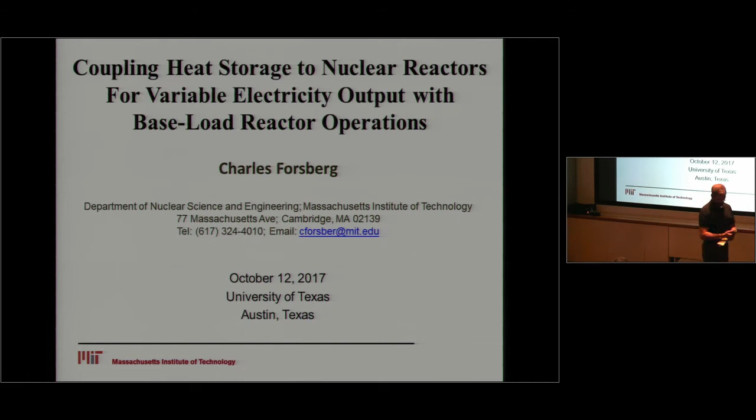I'm going to talk about heat storage rather than electricity storage, which of course is the in thing. Sounds like a very primitive technology, some of it is, but it has one redeeming feature, and that is it's cheap. So that's the general thesis. If you're going to have storage, it better be economic. Otherwise you might as well go home, it's irrelevant.

I'm going to cover a couple of things. The first one is the obvious: economics is central. Second, electricity markets are changing. And third, three heat storage strategies to provide dispatchable electricity with baseload reactor operations. That means the reactor operates at steady state.

The reactor operators are bored. We like bored reactor operators. Turbine hall, things are a little more exciting. We like exciting turbine halls. And we're going to look at three things: how to get variable electricity to the grid with heat storage in a steam cycle; second, setting a minimum price for electricity with the excess energy going to industry; and third, a nuclear power plant that buys and sells electricity depending upon the instantaneous price of electricity.

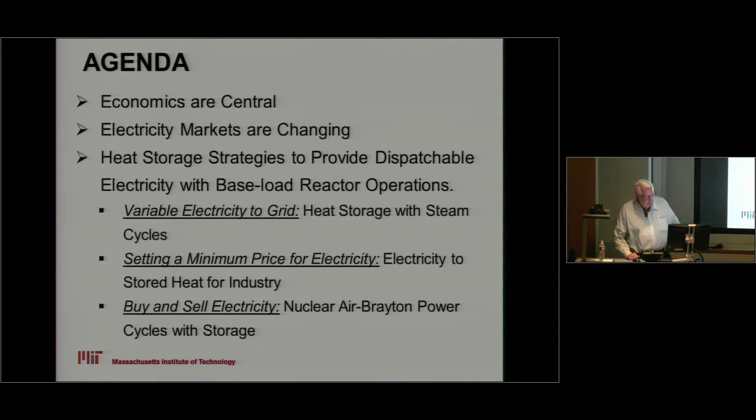Now, I'm only going to have one slide on economics, and that is that economics matters. The important observation here is that energy is 8% of the GNP. We cannot afford to double the price of energy without serious impacts on human standards of living globally. And thus you have to be economic, that's the bottom line. If something's 1% of the GNP, you can double it, maybe a few complaints, but it's no problem. If it's 8% of the GNP and you double or triple it, this is really, really, really bad news.

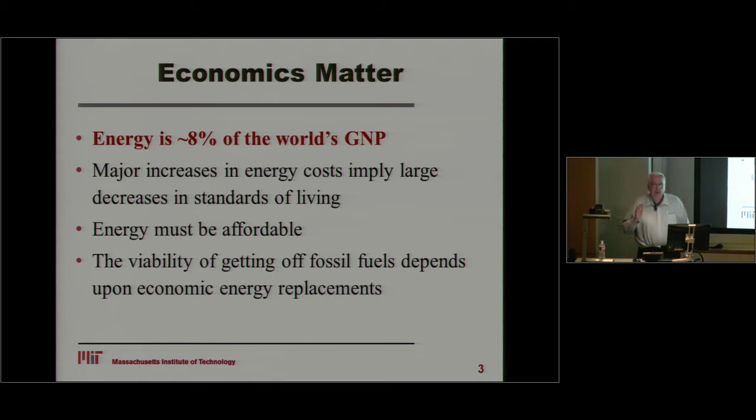Well, let's take a look at electric markets, and they are a-changing. Let's take a little look of history here. First, important to note, there's been no change in energy policy for 300,000 years. The strategy is quite simple: throw a little carbon on the fire.

I show our previous version of heat and light called the cooking fire and the modern version, the combined cycle natural gas turbine. What's interesting is these two technologies, though they look very different, are economically identical: they're economic at part load. You can run them at half capacity and it doesn't cost you any money, because the campfire with its stones and the gas turbine are low capital cost systems. There's not a lot of money in it. The money and labor is in collecting the fuel, be it wood or natural gas, and bringing it to the fire. That's been our strategy for 300,000 years.

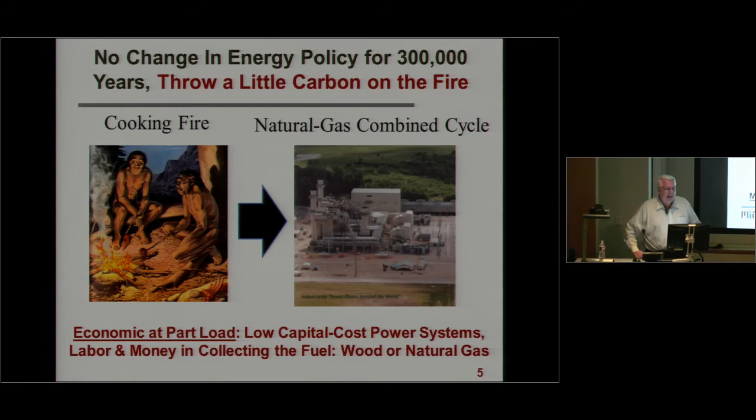Now let's take a look at the low carbon options. Nuclear, wind, and solar are high capital cost, low operating cost technologies, and if they're going to be economic, you have to run them at full capacity. If you run them at half capacity, the energy costs twice as much. This is a fundamental change in economics, the first change we've had in 300,000 years. So you can understand why this energy change to a low carbon world is so difficult. We changed all the rules.

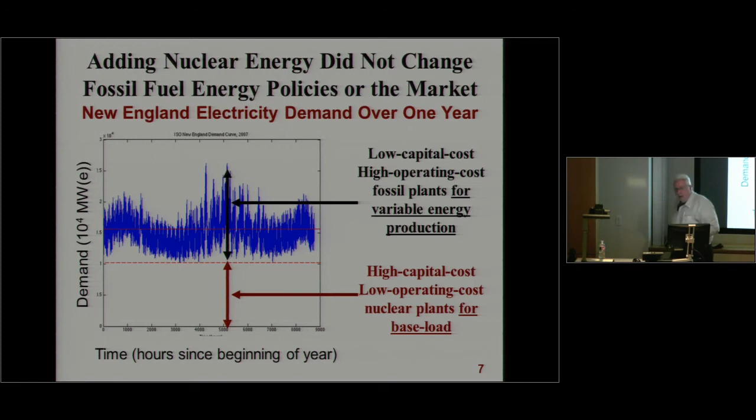Now let's take a look at electricity demand. This happens to be the yearly electricity demand in New England for 8,766 hours. The demand is the vertical scale. I'll make the observation that adding nuclear energy did not change fossil fuel energy markets or policies. What we see is the baseload market: nuclear's here, and the top part, the variable part, was provided by fossil fuels. That's been the historical model of energy for the last 40 years in the United States.

Now the question is, if no fossil fuels because of concern about climate change, what replaces the variable electricity production? What's the replacement for the gas turbine? That is the question. Let's look at this from a different perspective.

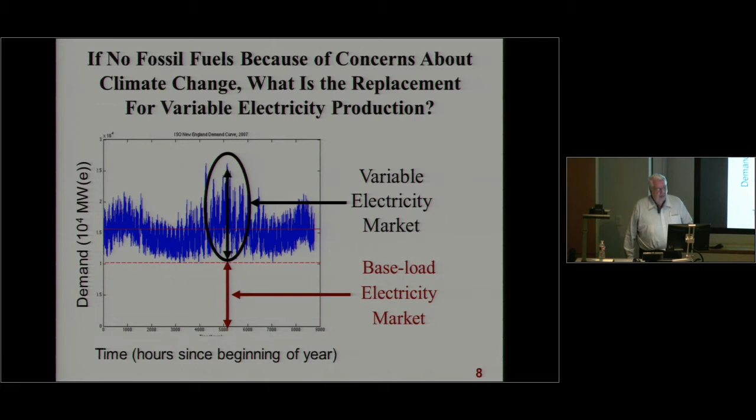Now I'll let you in on a little secret: nobody can make money on a solar system where the revenue or value of the product is zero. This is like in New England getting the price of tomatoes—everybody plants tomatoes in their backyard, and they all turn ripe in August. Guess what the price of tomatoes in August is in New England? Negative. People are giving them away to their neighbors.

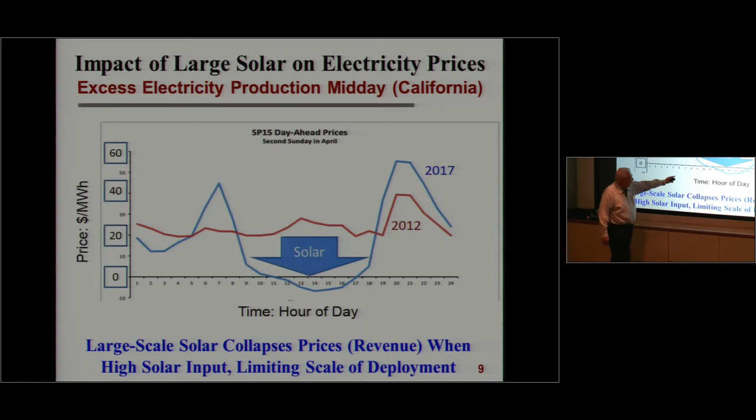So we've got a bit of a problem here, and of course this is a two-part problem. When the sun goes down, you suddenly need a lot of power, so you have to buy expensive stuff to produce electricity. What you can see here is that large-scale solar collapses the prices, that is its revenue, when you have high solar input. And that limits economic deployment to about 15% of total electricity production, if you have good solar conditions.

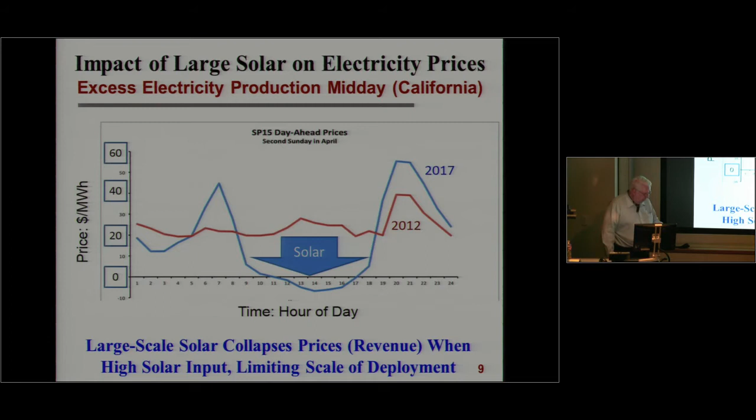You can play the subsidy game, but you can't do that on a full-scale economy. Well, that's what's the impact of wind.

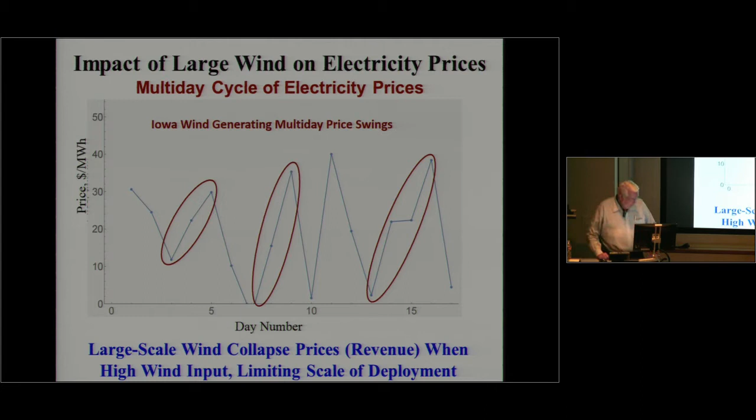This happens to be western Iowa wind. Price of electricity has a multi-day cycle with wind patterns, so we're looking at multi-day data. Guess what? If you install a lot of wind, price goes down, goes below zero, close to zero. Install a lot of wind, revenue collapses, limiting deployment. Bit of a problem.

Now, what this says is we need storage to match production with demand. But then the question is, what kind of storage? In this context, I will note there are two options, heat or electricity, or actually I should say work, for those of you who had Thermodynamics 101 or whatever the equivalent thermodynamics course is at UT here.

In this context, there's a big difference between nuclear and PV and wind. Nuclear produces heat, that is converted to electricity, and so we have the option of storing heat. We also have the electricity option. Electricity, of course, if you start with electricity, you want to store it as electricity. That means batteries, pump storage, a variety of other technologies. Well, let's take a look at this difference between heat and electricity.

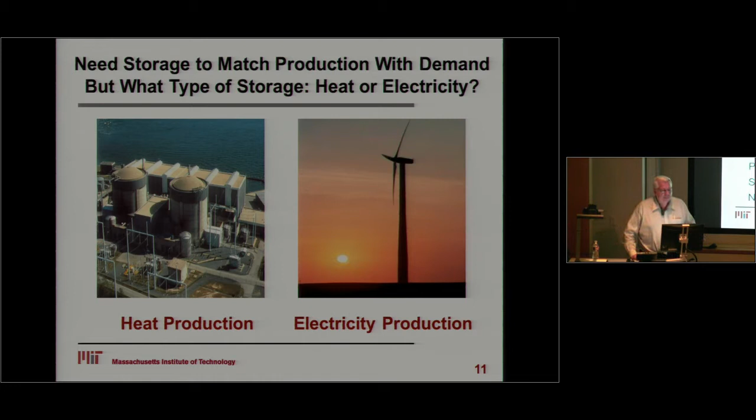The first observation we make is that heat storage is cheaper than electricity storage. There's recently a detailed study out of Nature Energy that estimated energy storage costs for 11 technologies at the terawatt scale and came out with a scary number of $340 per kilowatt hour, which essentially means you just tripled your electric bills on an all-renewable system. Factor of 2, factor of 3.

Now, the DOE battery goal for just the battery pack, never mind all that electronics, is $150 a kilowatt hour, with a lot of people debating about whether that is a fairy tale. The DOE heat storage goal is $15 a kilowatt hour, and by the way, that's by 2020, except it may happen before 2020.

So what we see is that heat storage tends to be 1 to 2 orders of magnitude less expensive. And that's what this story is about: buying cheap storage rather than expensive storage. Recognizing cheap storage helps nuclear, helps wind, helps solar, helps everybody except the gas guys. So that's the game.

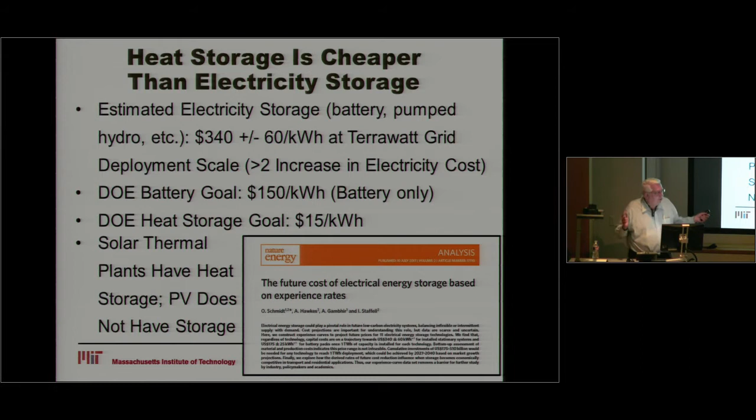Now, I'm going to discuss three separate areas. I'm going to start with light water reactors with heat storage, and that means variable electricity to the grid. It's coupling baseload reactors with steam cycles for heat storage. We had a workshop on this last June. If any of you have an interest in the workshop proceedings, just type in that very long address at the bottom and the report will come up as a PDF file and you can take it off the web. Most of this came out of that particular study.

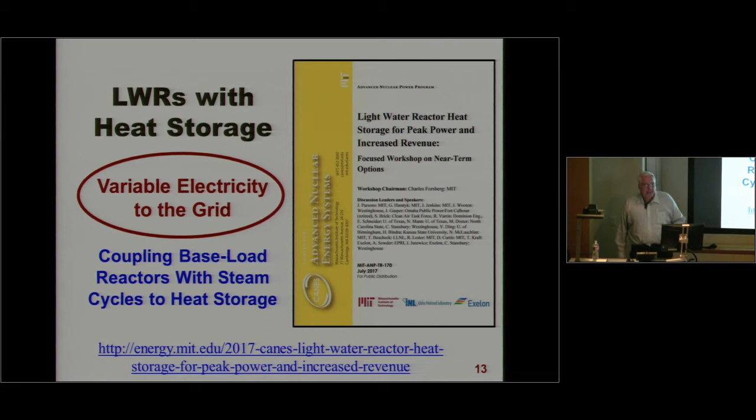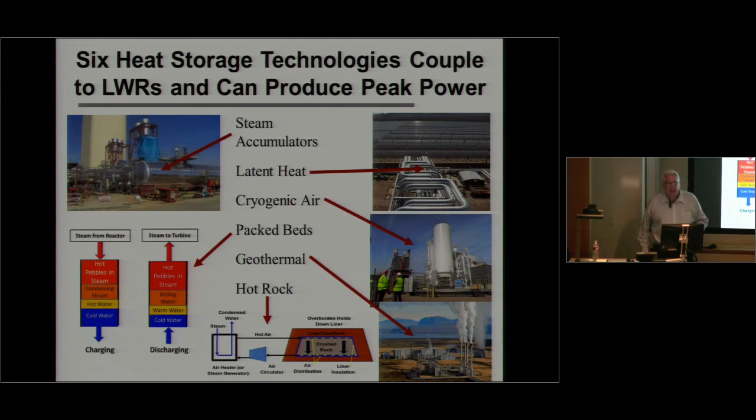Now, I'm going to cover this a little bit later, but there are 6 storage options that you can couple to a steam cycle. I'll go through the technical details a little bit later, but I want to discuss the more broad section first. There are 6 classes, slightly different, and we'll discuss that later. Now, the important observation here is that heat storage economics, in addition to absolute prices, are different than electricity storage economics.

Now, if you look at most electricity storage options, I'm using pump storage as an example. Batteries have a similar feature, almost all of them are similar. The storage system has 2 separately sized systems. In pump storage, the idea is when you have cheap electricity, you pump the water from the bottom of the hill to the top of the hill. And when you need extra electricity, the water goes through a hydroturbine on the way down the hill to produce the electricity you need. If you look at the economics of pump storage, there are 2 cost structures.

The one is the cost of storage. In this case, it's that reservoir on top of the hill, and that works out to dollars per kilowatt hour. The second feature is the cost of electricity input and output. In these systems, there's a turbine generator combination that can operate as a pump, a reversible turbine pump with a motor generator, that is a fixed dollar cost per kilowatt electric throughput. Two cost structures: storage and the input-output device.

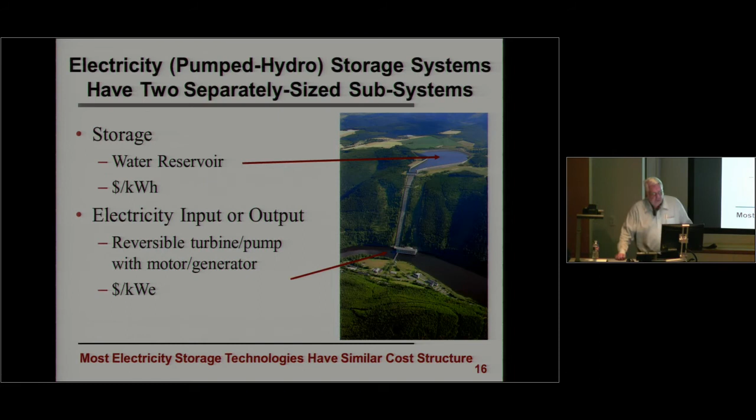And most other electricity storage technologies have a similar cost structure. Heat storages are a little bit different.

It has 3 separately sized subsystems. It has a system that takes the steam from the reactor and inputs it to the storage system, measured in dollars per kilowatt, and for most of these storage systems we're talking about, that is very close to 0. It's a really small number. There's a second cost, the cost of storage, dollars per kilowatt hour.

It has a third subsystem, taking that heat to convert it to electricity, and that's one of the more costly things because you have something called a turbo generator. But it's a 3-component system, 3 different things that you size separately with 3 different cost structures.

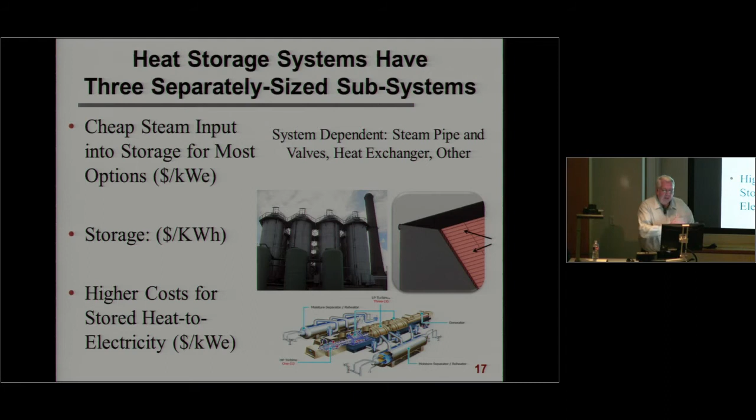And if you take a look at a power plant, you have several options of how you can do this. Option A, storage system uses power plant turbine for peak power. Steam goes to storage when prices are low. I'm not going to go through that schematic, by the way. Stored heat to LWR turbine systems for added electricity.

But the important point to be noted in a light water reactor, a nuclear reactor, is that when we take that steam and put it back into the storage systems, we only have to incrementally increase the size of the turbo generator. We have the option of using the power plant's turbo generator, the expensive component of the storage system, and instead of buying a standalone system, we buy our nuclear reactor with a slightly larger turbine and a slightly larger generator. Why is that important?

That incremental cost is less than half the cost of a standalone system. Factor of 2, factor of 3 reduction in the cost of the expensive component, which is that turbine hall. Factors of 2, factors of 3 are economically very important.

There's one other feature. If we use the existing turbo generator, it's operating continuously all the time. So if we want to add more power, we can add more steam very quickly, and the power level will go up or go down very quickly.

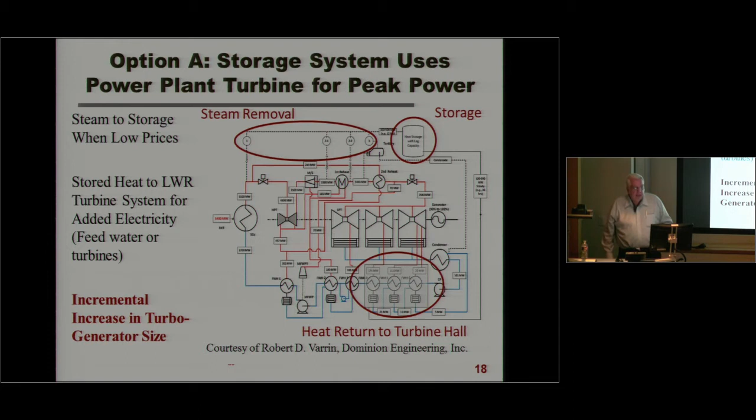So by integrating storage into the steam cycle, we get a couple of things, of which the most important one is knocking down the capital cost. The second one is fast response. Option B, of course, the economics for existing plants with added storage suggest a power output that would go from 80 to 105%.

And here's our curve again of our solar curve. When the price of electricity collapses, we take a lot of steam out in a hurry. We lower the power plant's production and we dump it into storage. So we may take out most of the energy going into the storage system over a period of maybe 8 hours or maybe 6 hours.

But then we bleed it back into the power generating system over 16 or 18 hours. So we minimize the size of the turbo generator system, the expensive component, and thus minimize the cost of our overhead storage, total storage system.

Now, fortuitously for us, pure luck, it turns out that the solar curve matches very well with a steam storage system hooked to a nuclear reactor, because the solar only provides a lot of heat for a limited period of time, and it's easy for us to get heat out of the reactor and into the storage system cheaply. On the other hand, we can put the power back into the grid over a long period of time, so we don't have to buy a lot of that expensive generator, expensive turbine.

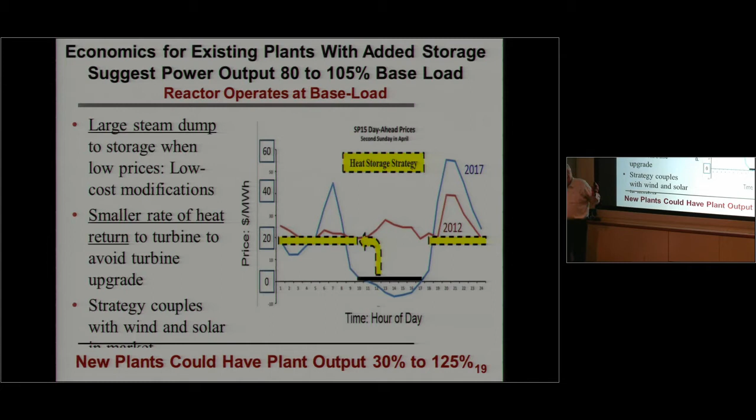Makes sense. This is customizing your engineering to match the market. It's very important on storage systems you start with the market. It drives your engineering. It's the only way to make the system economic.

Now, new plants, if you do the analysis, we think a new plant might have a power output from 30 to 125%, where 100% is base load.

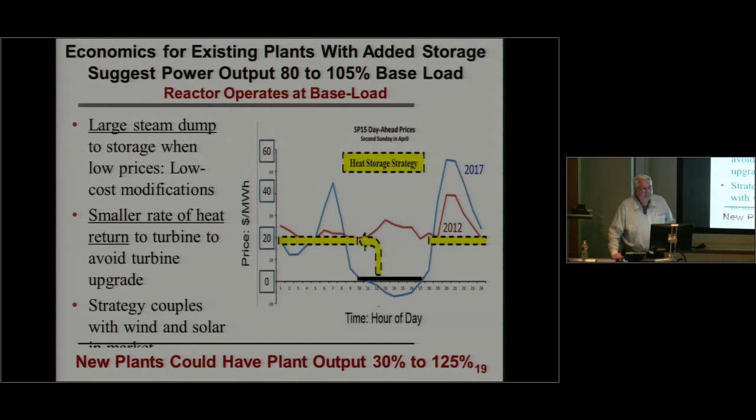The other option is heat from storage to a standalone turbo generator. It gives you a complete set of design freedoms, but it may cost you a lot more money, and money is, of course, the concern that we have in heat storage. But I would think this would be a preferred option with an existing plant.

No, it turns out most nuclear existing plants have 10 to 15% excess capacity in the turbo generator set, and it looks like in most of those plants we can backfit. We can't dump all of the heat out, but we could go from 100% power maybe down to 70 or 80% power, a partial storage solution.

New plants, you have much more freedom, but it's a plant-by-plant specific question. And there are lots of reasons for that. It turns out the nuclear reactor was expensive and the turbine hall was cheaper, so they oversized the turbine hall to make sure that if they could get an uprate, we wouldn't have to do anything in the turbine hall.

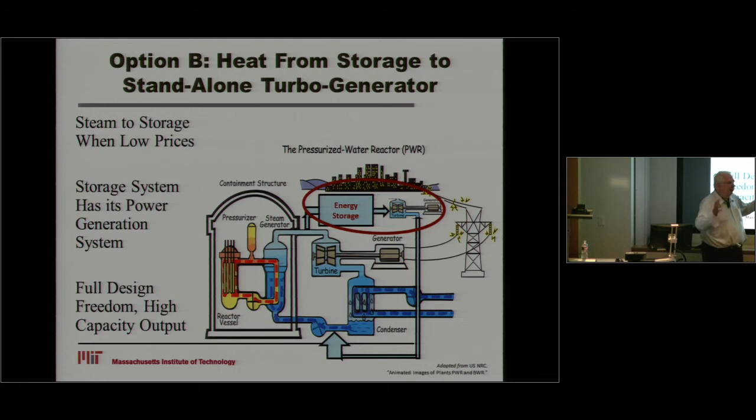Well, let's take a look at what the storage options actually are, the technology that I've been talking about.

The first one is steam accumulators. You have a big tank of cold water, and you add steam to the cold water to create hot pressurized water. To get your steam out, you release the valve, open the valve, and flash the hot water to steam, and the steam goes out to your turbine or your feed water train. The reason you store hot water is it takes less than a third of the volume of storing steam. What's the status of this technology?

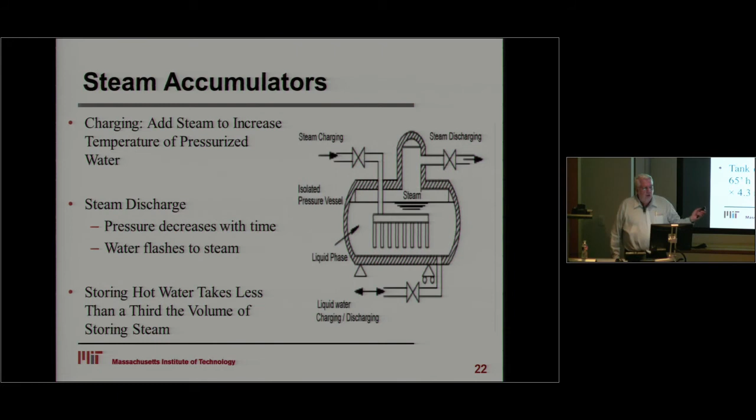Let us show you the status of the finest technology built by Siemens in 1929 in their steam accumulator in Berlin. Charged with a coal-fired power plant, 50 megawatts, separate turbine, operated until about 10 years ago for a peaking unit. So that's the current status.

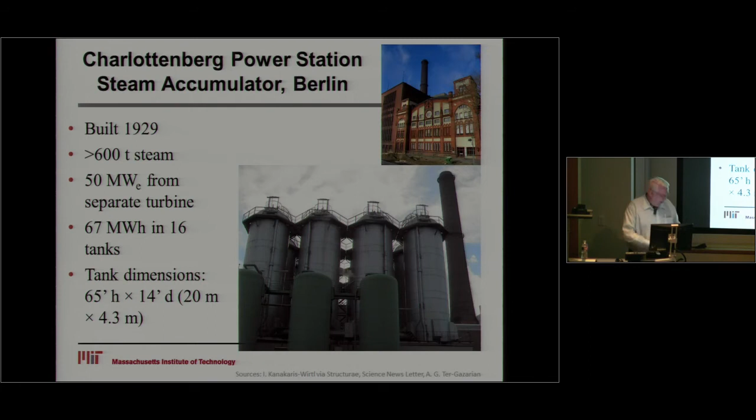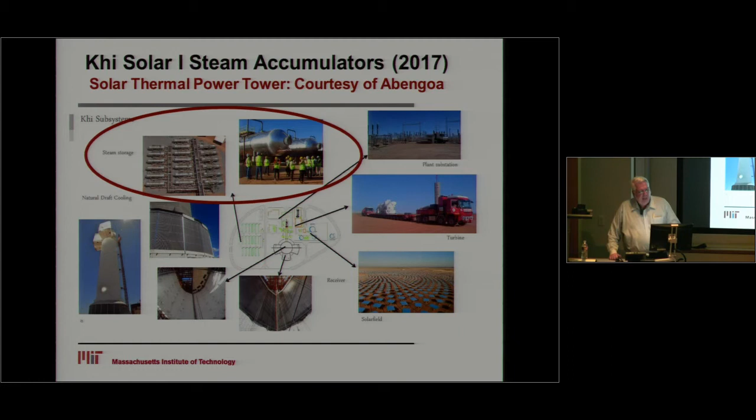That's the 1929 status. There's an accumulator at a solar plant in South Africa that is now coming online. You can see what the newest version of a steam accumulator looks like, and it turned out in their case they optimized it to a bunch of horizontal tanks. I don't know if that's progress or not, but this is the 2017 version of it. So we can safely say this is a technology where the only question is which supplier provides it. It's really off the shelf. Probably Abengoa would like to actually sell you the system if they could.

A second option is to store heat as a low pressure liquid or solid. This is done at a lot of solar thermal plants. The solar thermal guys, unlike the PV guys, have recognized that heat storage is a lot cheaper than electricity storage. Most of the big utility solar thermal plants come with heat storage. They've concluded that selling electricity at $0 per megawatt at noon is a really bad economic model. While the PV guys don't have any choice, the solar thermal guys are going to collect their production tax credit and not sell electricity in the middle of the day. They have an allergy to low income.

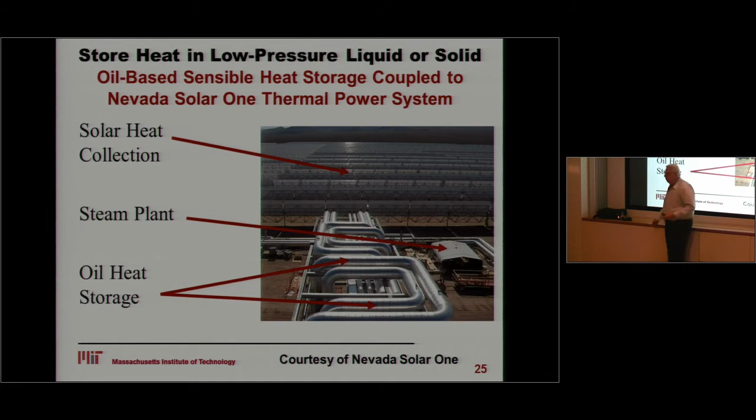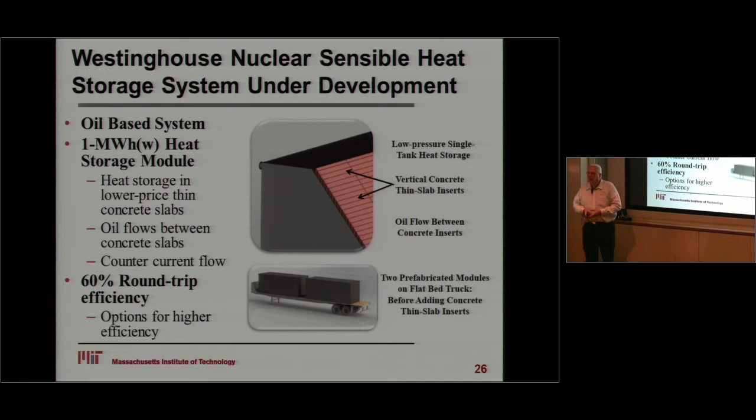The thing about this is they discovered the most expensive component in the whole system was the heat transfer oil. Seems a little strange, but it turned out that was the expensive component. So their solution is these modules will be filled with concrete plates about 3 inches thick that occupy 95% of the steel boxes, because concrete is cheaper than heat transfer oil. I know that sounds rather strange comparing heat transfer oil to concrete, but concrete really is a lot cheaper.

The round-trip efficiency for their economically optimized system is about 60%. That is, if you produced a kilowatt hour of electricity going straight to the turbine, you would produce 0.6 kilowatt hours going through the heat storage system. That could be raised to about 0.8 or 0.9, but for the plant they were looking at, the economic optimum came out at about 60% round-trip efficiency.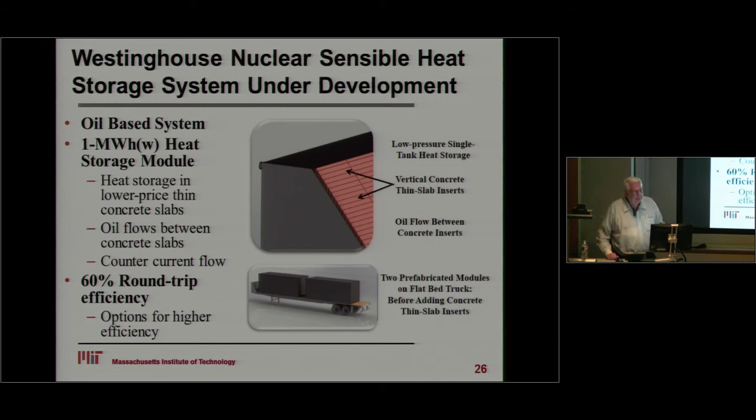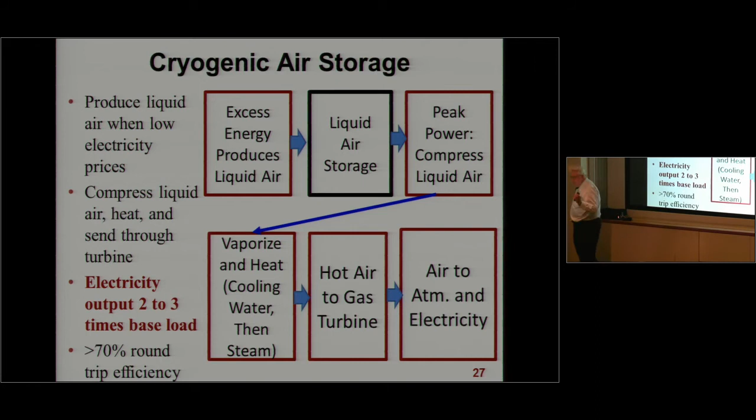That happens to be the pilot plant. It's a 5 megawatt, 15 megawatt hour commercial demo plant in Manchester. That particular plant happens to be integrated with a biogas power plant, with the same steam conditions as a nuclear plant. So that's the status of that technology.

Now, with that said, we are going to go to technologies that are not as well developed. These three are deployable within a decade or less, some of them within 5 years or less.

There's something called countercurrent pebble-bed heat storage. You input high temperature heat, high temperature steam, you heat pebbles, you get condensing steam, hot water, and cold water during the charge cycle. In the reverse direction, for discharge, you push cold water in and get warm water, boiling water, and steam. I'm not going to go through the details, but thermodynamically it should have the highest round-trip efficiency because it's a countercurrent system.

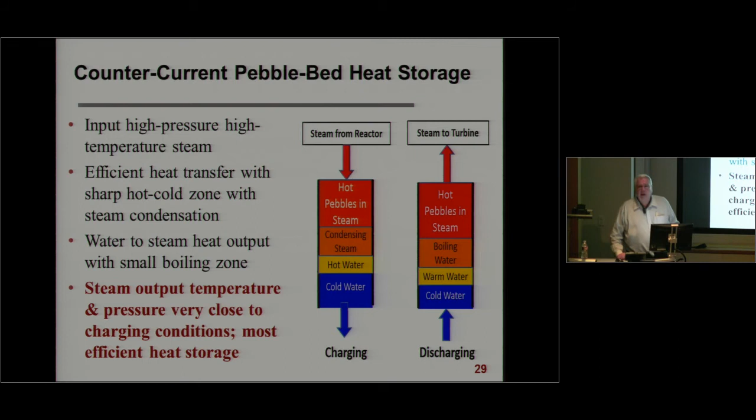Lots of detailed, complicated work. It's in the laboratory status.

Fifth technology is hot rock storage. What you do here is you have steam, hot air, and cold air—you heat the hot air, and you may heat it again with electric heat. You take the hot air and heat a pile of crushed rock to high temperatures and circulate it back. To get your heat out, you reverse the direction of flow. The hot air goes through a heat exchanger, creating steam that goes to the power plant.

The feature of this technology that is of relevant interest is the very low incremental cost of heat storage. The cost of crushed rock, approximately 3 inches in diameter, is measured in the $1 to $2 per kilowatt hour range or less, versus $350, $450, $550 for batteries. That rock pile, by the way, would be about 100 feet high—not exactly a small rock pile. But the incremental cost is very, very low.

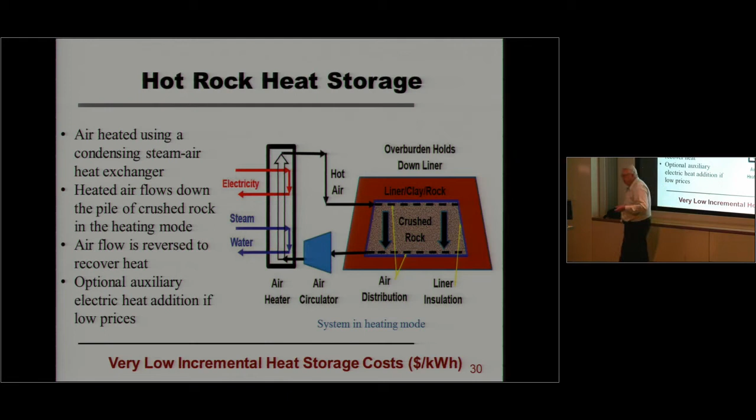And the last option, of course, is nuclear geothermal heating, where you heat hot water—heating a chunk of rock underground, typically 300-400 meters on a side, creating your own private geothermal heat source. Then you use a geothermal heat plant to get the energy back out as electricity. This option has the unique feature that seasonal storage is very straightforward, so you can go right through it from A through Z. But it's very early in the development stage, with lots of geology and engineering questions.

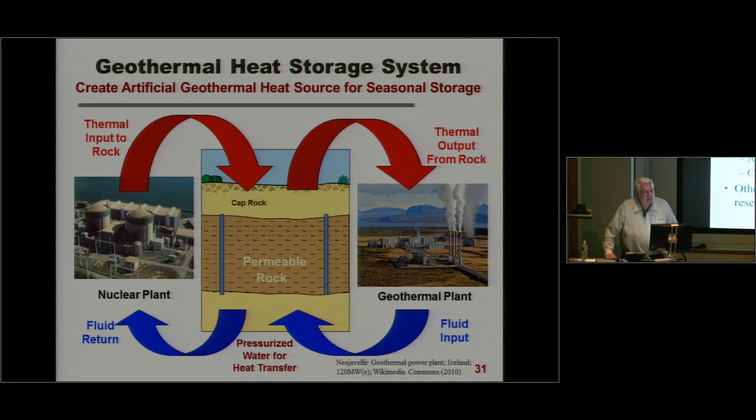With that, I'd like to change subjects. Now that we've covered LWRs, that's the near term, let's discuss the issue of Firebrick resistance heated energy storage, our second area.

Now, as I mentioned earlier, when you put solar or wind on the system, you get a lot of zero-priced electricity. This technology is designed to set a minimum price of electricity by sending excess electricity from the electric sector into the industrial sector.

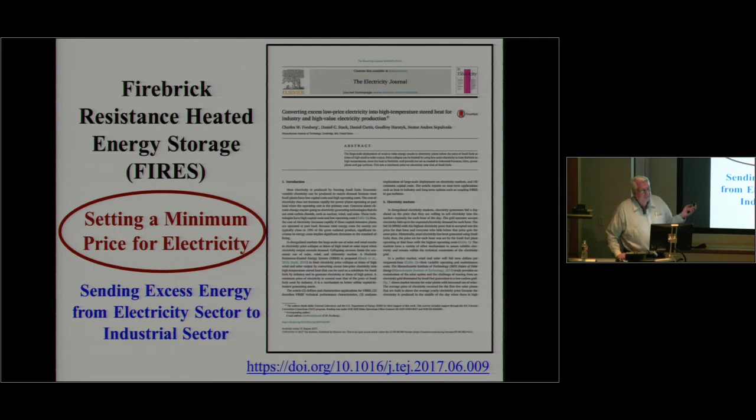What is it? Buy electricity when prices are less than fossil fuels used by industry, particularly natural gas. We have a lot of electricity in the U.S. that's sold for less than the price of natural gas. So if it's sold for less than the price of natural gas, why isn't it replacing natural gas? What we do is electrically heat insulated masses of firebrick to very high temperatures, and use that stored heat, delivered as hot air, to provide industrial heat or peak electricity production.

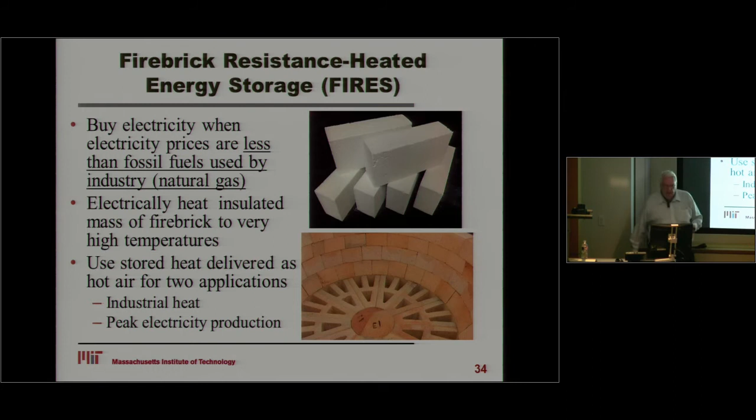Schematic is shown here. Firebrick—you know, the stuff in the back of your fireplace—we heat it electrically when the price is low. When we need hot air, we blow cold air through the hot firebrick to produce hot air, adjusting the temperature for an industrial kiln or furnace. It's a partial substitute for natural gas.

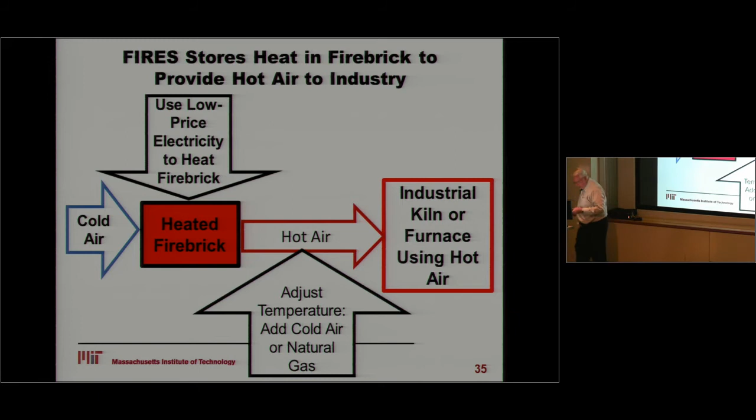Now, what FIRES does is buy electricity when prices are less than the competing fossil fuel for the industrial world. So here we have our curve. If you install FIRES, it's going to set a minimum price that is substantially below the wholesale price of electricity, sometimes in California or the wholesale price in Iowa.

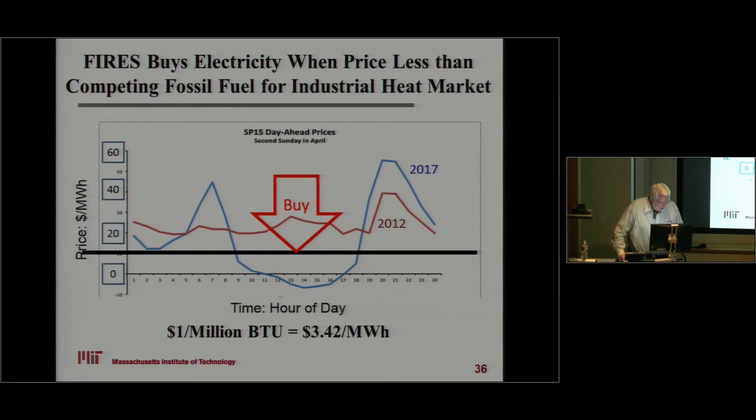So it's a bottom dweller. We grab all cheap electricity and send it to our industrial colleagues. This happens to be an energy diagram - that's the energy size of the electric sector. If you're trying to dump a lot of excess energy somewhere, the only people who need a lot of heat all the time, 24 hours, 7 days a week, is the industrial sector. So the answer is, if you've got cheap excess electricity, dump it to the only customer who's always there. It's just a market-driven reality - who can always buy if the price is right?

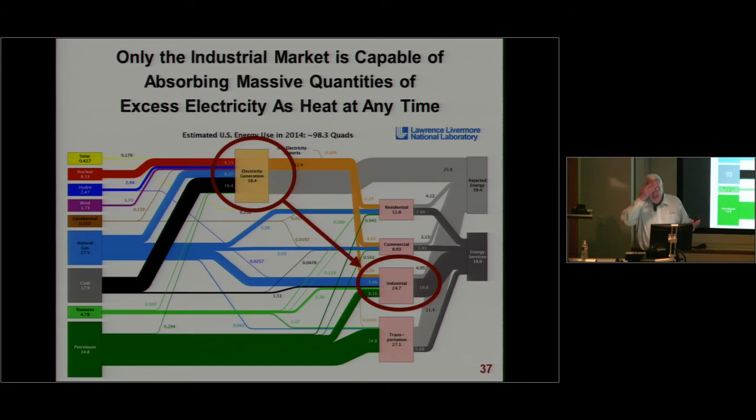Now, I should explain what's going on here in China. This is because of a subsidized electric rate at night. If you go to China, you probably heard they had a small air pollution problem. Last time I was in Shanghai, I couldn't see across the street. It's not a good situation. A lot of that air pollution is local, generated by apartment complexes burning coal in boilers next to the apartment complex, with 50-foot stacks. This is not a good environment.

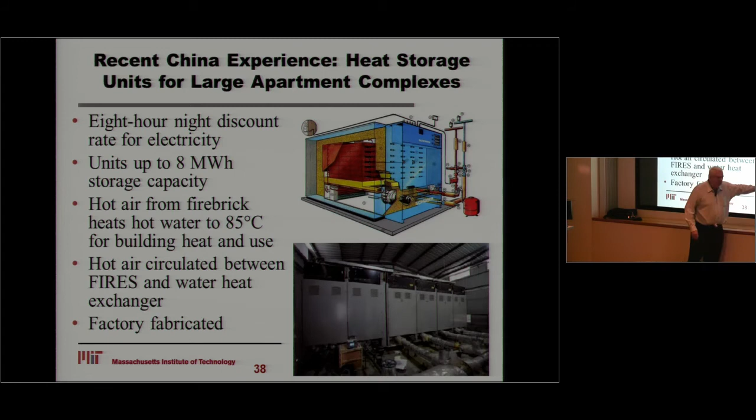So the Chinese are trying to clean up some of their towns by providing a discount electric rate at night when available, stored as heat to provide hot water. Not a very efficient system, but it certainly solves the problem of local air pollution. But that's where the status of the technology is.

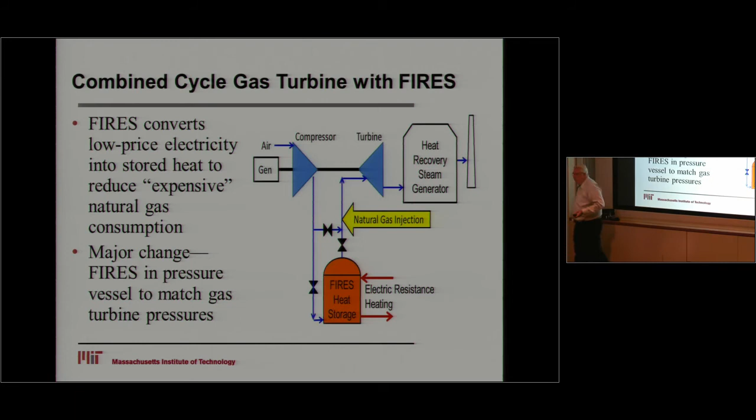So FIRES is a way to grab cheap electricity, put it into a storage system to use later to run the gas turbine. When the price of electricity is really low, the gas turbine is normally off - nobody's going to run a gas turbine when the price of electricity is zero. Even at $3 a million BTU, it costs money. So this is a way to take that cheap electricity, store it, and run the gas turbine at other times. The strategy is simple: buy when it's cheap, store the heat, run the gas turbine when the price is high. Round-trip efficiency of electricity to heat to electricity is about 60% with a state-of-the-art gas turbine. Not great, but not bad.

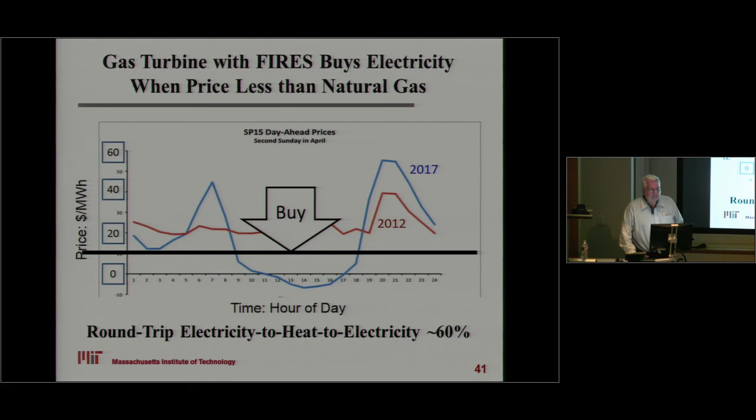Now, the economics - there's a few technology development issues which I won't go into, you can ask me later. That's why this isn't being done today, although I think in 10 years it'll happen.

If you think about the grid as a whole, what do you require? You require storage plus generating capacity to prevent blackouts. Storage by itself doesn't solve the problem. If you have storage hooked with solar, what happens if you have a week full of cloudy skies and no solar? All of your batteries run dry, they're dead. What do you do for electricity? Well, you turn off the lights, or in Texas you might turn off the air conditioning. That would cause a revolution in the summer. Let's get serious - light failures are one thing, air conditioning failures are far more serious. So if you think about the grid as a whole, you need storage plus generating capacity.

What this option here does with FIRES and natural gas is we have the storage option, but we have the capacity in the gas turbine. Your alternative is to go buy an electric battery, pick any option you like, and then go buy the gas turbine when you can't generate enough, when you don't have enough storage in your battery to guarantee electricity. Our position is this is going to look a whole lot cheaper than A plus B. Remember, in both cases we're buying the gas turbine - that's the part that's guaranteed. So our goal is to make FIRES cheaper than batteries.

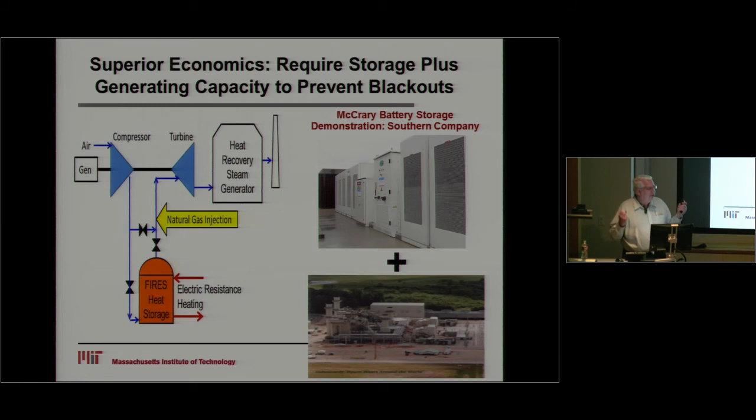Well, let's turn to the last subject. We can take a high-temperature reactor, hook it to a combined cycle, and couple that to FIRES, and buy and sell electricity. That, however, is a slightly different game. It's zero carbon, and we have higher electricity-to-heat-to-electricity efficiency than any other system on the planet Earth.

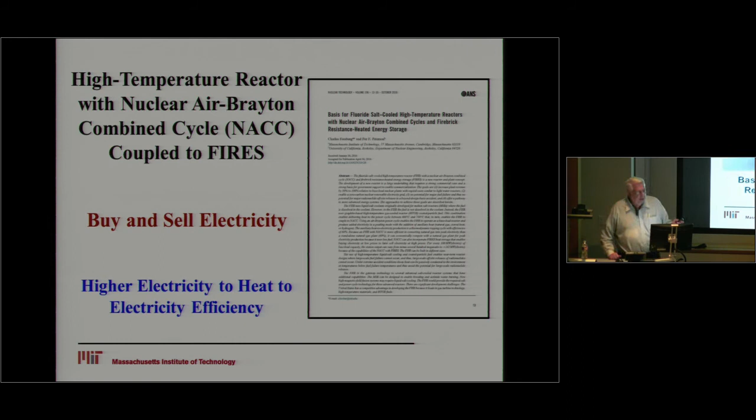Well, let's take a look at the system. What we're talking about is a high temperature reactor, hooked to a gas turbine to produce variable electricity and steam. That's the game: a nuclear Air-Brayton power cycle.

And the heat source for the gas turbine is nuclear heat, FIRES heat, natural gas, or ultimately hydrogen. The good news is our gas turbine doesn't care how you get the heat. It's the beautiful thing about gas turbines - non-fussy on the fuel supply.

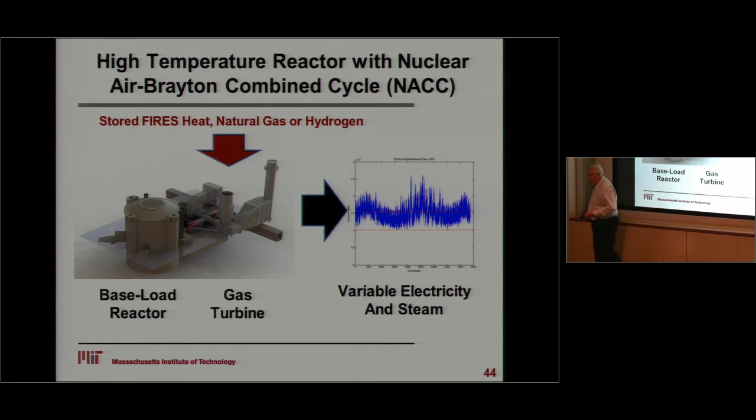It turns out if you're a nuclear engineer, you need to match temperature conditions. This kind of power cycle will work with an FHR, that is a fluoride-salt-cooled reactor with solid fuel and clean salt. It'll work with a molten salt reactor. If you're an optimist and a physicist, it'll work with a salt-cooled fusion machine. Do we have any physicists or fusion guys in the audience? Or did I miss the wrong audience here? And it'll also work with a solar thermal power tower.

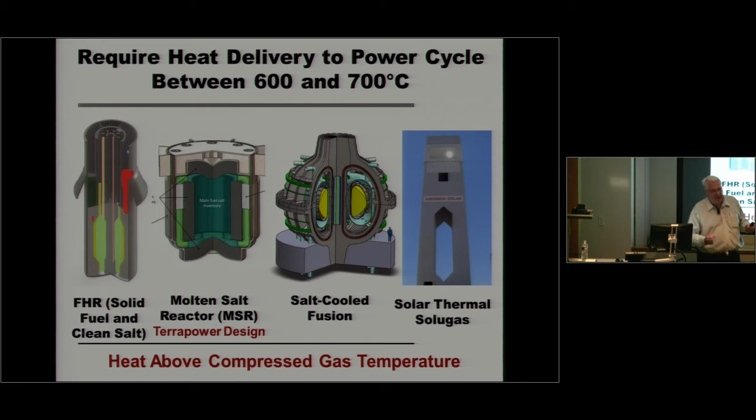Anybody who can deliver heat in the 600 to 700 C range, it'll work with. And the reason you have to be in the 600 to 700 degree range is that with a gas turbine, the first step is compress the gas. The temperature of that compressed gas coming out of the compressor is over 400 Celsius. So if you're going to add heat to a gas turbine, you've got to be a lot warmer than 400 Celsius. The gas turbine's driving this design.

Well, let's take a look at the cycle with natural gas. We filter our air, we compress it. We have compressed air - it goes through a heat exchanger, getting nuclear heat. Heat from the nuclear reactor, heated up to 670 to 700 C, goes through a turbine, goes through a second heat exchanger, heated up to 670 Celsius, goes through the second turbine. Then it goes to the heat recovery steam generator, producing steam and more electricity, and up the stack.

Now, the important point here is the second heat exchanger, where the compressed gas is coming out at about 670 Celsius. That temperature limit is determined by the materials of construction of a heat exchanger. It turns out, in the real world, it's very hard to build an affordable heat exchanger over 700 C - expensive materials. So heat exchangers tend to be limited to about 600, 700 C peak. That's what limits the exit temperature coming out of this heat exchanger going to the gas turbine. With this cycle, the cycle efficiency is around 42, 43, 44%. Not bad, but nothing very exciting.

Well, the heat exchanger is limiting the temperatures to about 700 C here, but the gas turbine views 700 C as a cold, frigid day. We have industrial gas turbines running at 1400 Celsius. Mitsubishi has a commercial turbine on the test stands running at 1600 Celsius - by the way, that's the melting point of iron. It's a hot turbine. The reason the turbine can survive this is the turbine blades are internally cooled. There's cold air rushing through the middle of the turbine blade to keep it cooled, because if it's all 1600 degrees Celsius heat, the turbine blade would go chunk and break apart in a few seconds flat.

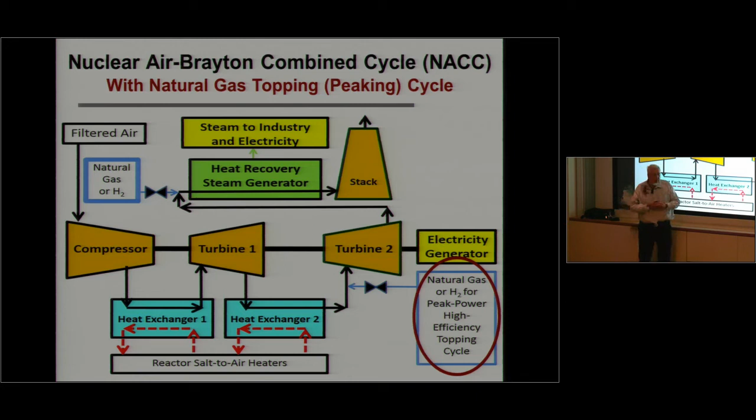Here's what we have: baseload electricity, 100 megawatts, 42% efficiency. We add additional heat above the low temperature 670 C gas coming out of the nuclear heating cycle. So we have a low temperature cycle at 670 C—I know that's not normally your definition of low temperature. We add an additional 142 megawatts. The incremental heat to natural gas efficiency is 66%, more efficient than any standalone gas turbine or heat engine on Earth. And we've only raised the temperature up to 1065.

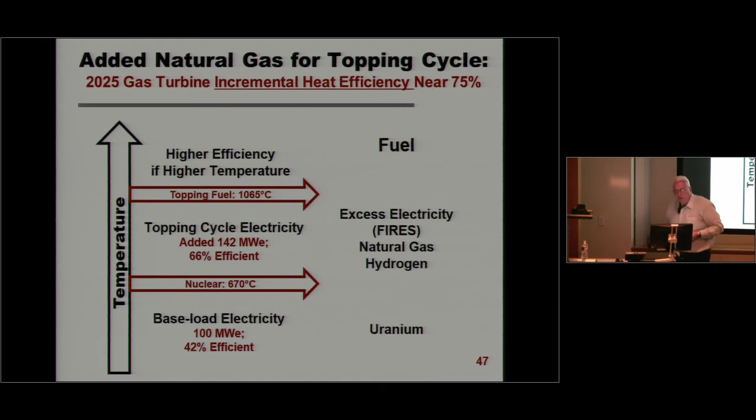If we put a Mitsubishi 1600 C turbine here, that's going to be over 75%. So what we have is a machine where the incremental heat addition is converted into electricity with remarkable efficiency. Economically, this machine, on paper at least, can beat a conventional natural gas plant with natural gas. A nuclear plant can beat a conventional natural gas plant because in peaking mode, it's more efficient at using natural gas than the gas plant is. The only way you can beat natural gas is if you use it more efficiently than the competition.

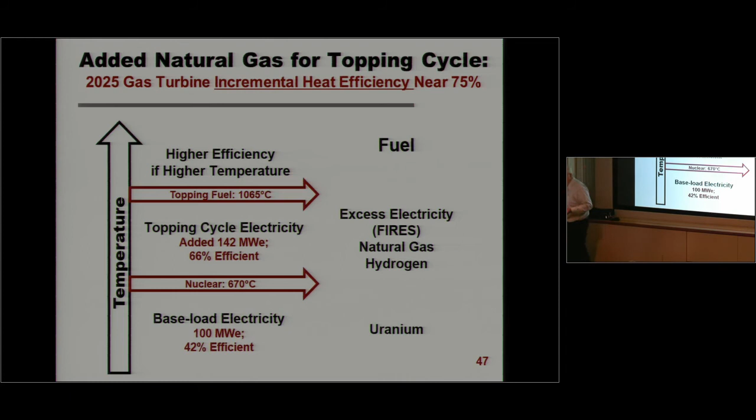Now, that's talking about natural gas addition, but if we have low-priced electricity, we can use FIRES, made of firebrick. Turns out the only material in the world that can go to 1600 Celsius without melting is firebrick—how convenient. So we can electrically heat the firebrick and produce and store hot gases that are then used as a peaking cycle in our gas turbine.

Charles, in these peaking cycles with that higher elevated temperature, is that a problem for the heat recovery steam generator, putting a higher heat into that steam generator? Somewhat higher, but fortunately our friends at all the major turbine manufacturers have actually solved that problem.

One thing people don't appreciate is that big refineries and chemical plants all use combined cycle plants, which burn a lot of trash gases. Those turbines are designed to run up and down like a yo-yo over a wide variety of temperature ranges. So there are turbines out there—they have a little bit higher maintenance costs, but the turbines are available and the heat recovery steam generators are available.

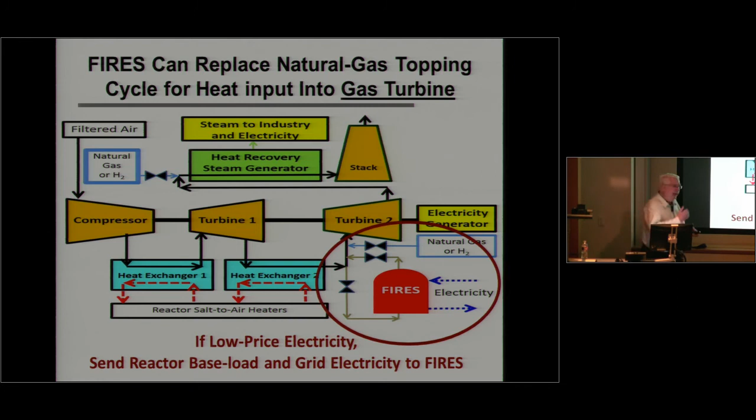All made possible, by the way, by the $1 to $3 billion a year the world spends on advances in gas turbines. This technology would not have been viable 15 years ago because the gas turbines weren't good enough. It's only in the last 15 years that gas turbine technology makes this a credible option.

Our strategy with the nuclear Air-Brayton cycle is straightforward: buy when the price is low, sell when the price is high. Or buy when you have an excess, sell when you have a need. In short, a power plant that incorporates both storage and generation, the natural gas version and the nuclear version. The natural gas version has CO2 emissions; the nuclear version does not.

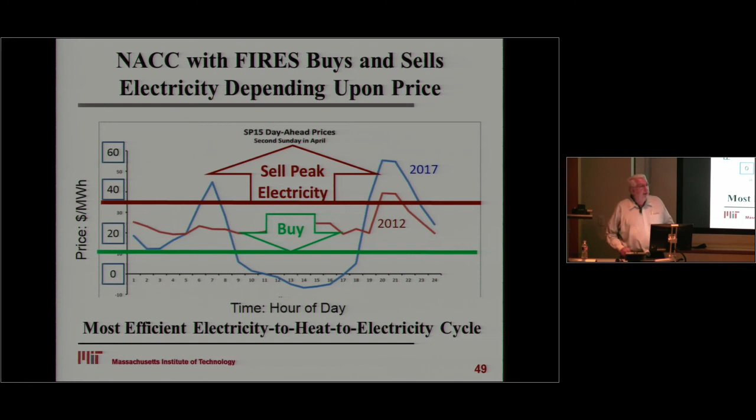Enabled by FIRES, but also enabled by advances in gas turbines—I cannot overemphasize that. 15 years ago you could not have played this game because the gas turbines literally were not good enough. It's only with the F-series turbines that they became good enough. For those not familiar with the gas turbine business, there's A, B, C, D, E, F, G, and the first H turbine went online earlier this year. So guess what comes after H?

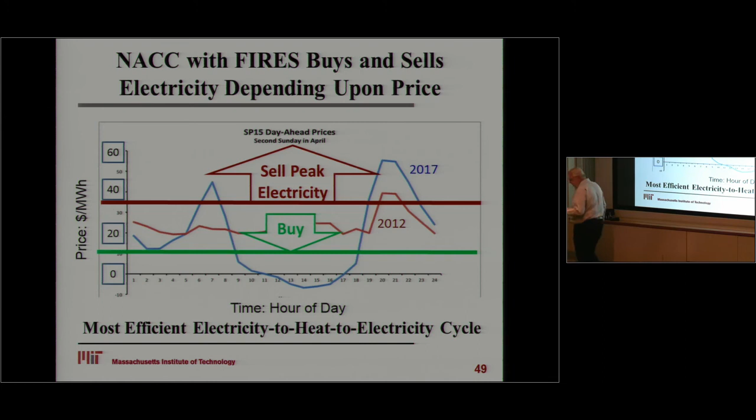Well, where does that lead us? The most important thing is that markets are changing. Five years ago, this talk would have been pure nonsense—a waste of your time, a waste of my time, completely, totally, absolutely irrelevant. It's the change in the market, very important. Second, a low-carbon world requires dispatchable electricity. People do not want the lights to go off or the air conditioning to go off—that's just the reality. Nuclear energy can provide that dispatchable electricity.

The second observation is heat storage is much cheaper than work storage for a whole set of fundamental reasons, and that creates incentive to use heat storage. In our case, we're looking at three classes of heat storage technologies with very different characteristics: steam cycles with baseload nuclear reactors for variable electricity, always some output, but variable.

Fires to consume excess electricity, setting a minimum price for electricity roughly equal to that of fossil fuels, and sending the excess to industry as heat. It sets a minimum price, avoiding negative priced electricity, which is suicidal for solar and wind, and very bad for nuclear. And last, the gas turbines with fires buy and sell electricity depending upon need and market. That's the unique capability of combining a heat storage system with the power generator.

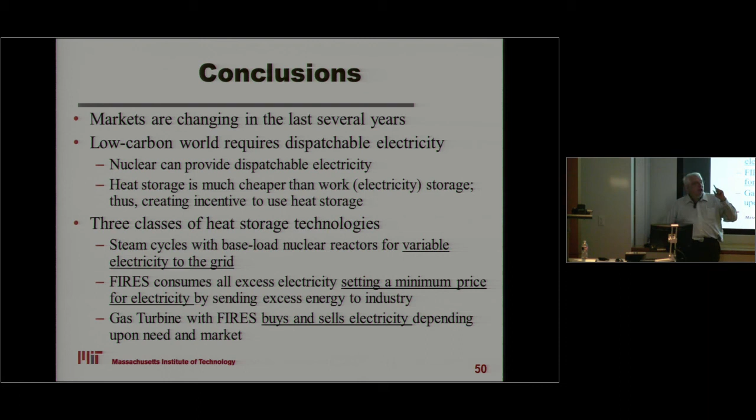Yes, but Iowa has two other features. It has low-cost electricity right now, and it has one other feature: they have lots of biofuel plants. And our friends in California pay more for low-carbon biofuel where you didn't burn methane or natural gas in your biofuels plant.

So the strategy here is: I'm going to build FIRES for two reasons. First, I'm going to reduce my heating bill, and then I'm going to charge California 20% more for my ethanol. So—

Well, if somebody's going to give me a subsidy for low carbon ethanol—the issue of the market, the issue isn't installing 1,000 gigawatt hours of FIRES. It's the first couple of markets, and the first couple of markets for any new technology is some market niche where something crazy is going on, where the economics are really favorable. So they have big wind in Iowa and they have big corn, and big ethanol plants, and some jokers in California that pay extra for low carbon ethanol. I apologize for my cynicism.

Sorry, I have one more question. So what you've introduced here, to my understanding, is more like supply side management. So how can we profit the most from the utility side? How are you also looking at management on the demand side? There's a lot of data centers, server farms that can be taken off grid at a moment's notice, and there's a lot of those smart meters now in the average electricity user, and they're also trying, from the demand side, to smooth out the demand curve. So how would you compare those two approaches in the market—which one will fare better?